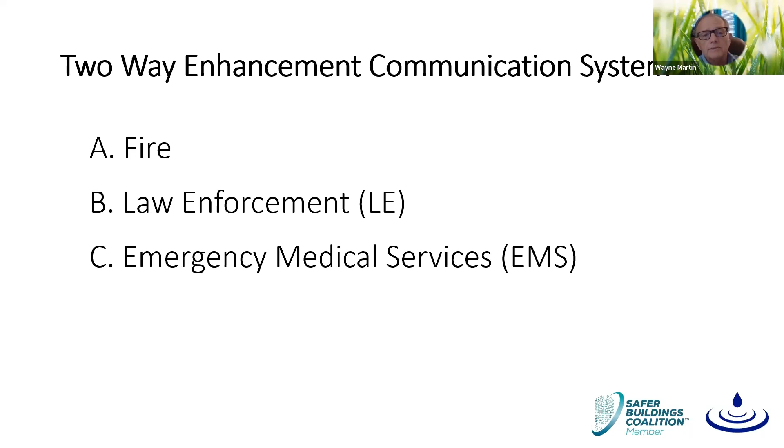Testing and reporting. What does it take with these systems to get them in place? As far as a 20-point testing system, it's done on all floors, and the importance of reporting to the AHJ. We have an implementation of the process and the fact that we should be testing now, when permits are required, installing by January 1, 2025, how quickly that's approaching, and the economic cost of compliance or non-compliance. We've got lots of deadlines in 2025, guys, for towers, huh? It's going to come up quick.

Yeah. So who's responsible? The community association manager. I put that on top because you're the key to this. Obviously, your board of directors. What can occur possibly if someone is trying to sell a unit? And then violation of the fire prevention code. And this is in the fire prevention code.

And then when we get to the end of this program, we're going to review the AHJ dates and then compliance. So as we look at this overview, it really all started with September 11, 2001. Literally thousands of people died that day. 343 firefighters died that day. There was failure of the communication system in the building where police and fire could not transmit with a two-way radio out of the building.

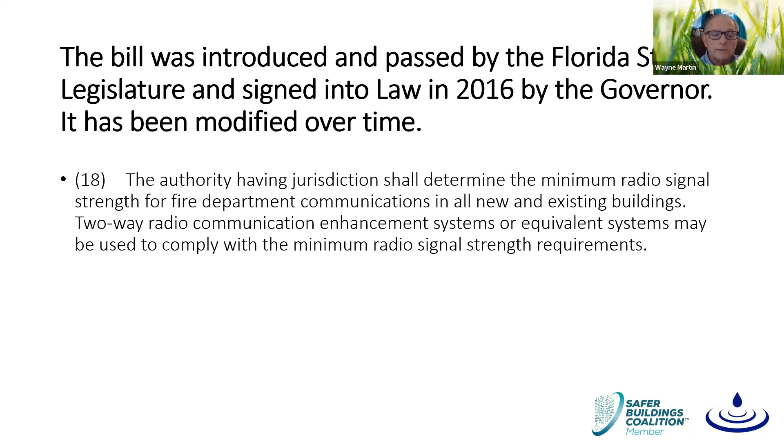Florida statute, again, I'm spending a few minutes on that. Some changes that were made: they took out wood frame buildings with exterior corridors less than 75 feet. There may be a few of those around. There's not many, but they did do that. And then if you do have that and you're declaring that as an exemption, you must have documentation that's the case. I think Ian took out a lot of that. Yes.

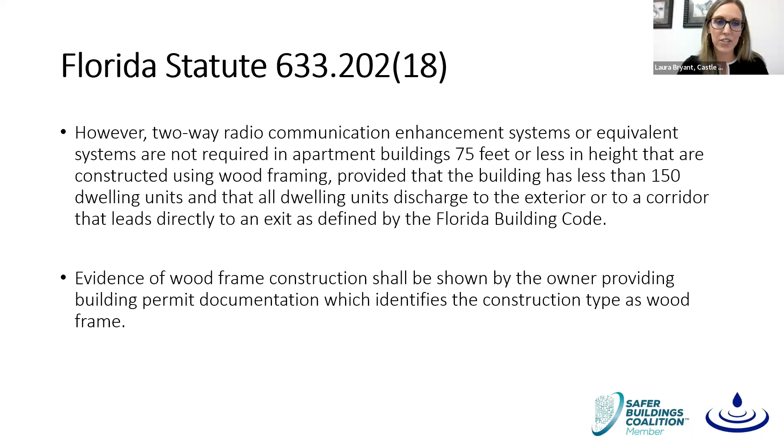So there's a part where a change was made with existing high-rise buildings and where they gave them time. Now, this originally was put in place in 2016, but people should be getting that testing done now because by statute, it's in place at the moment. By January 1, 2024, you should have a permit or you should be under contract with your contractor having a permit. Now, today is May 2023. January 1, 2024 is going to come up very quick. So the key to this is getting testing done and having that permit.

So as you see here, January 1, 2025 is when the existing high-rise buildings must be in compliance and must have the installation of the enhanced two-way radio communication system.

On that note, Wayne, and maybe this is a Dain question, what is your lead time that you're giving property managers if they call and say, I need to schedule a test? Are you backed up? Because again, this is a statute that has been around, but they're giving us a deadline. Does it take 3 months to get... Less than 30 days, as early as 7 right now. Okay, so that's to get the test done. Yes. And the report comes back how fast? Very quickly, a day or two after. Okay, wonderful. Good information.

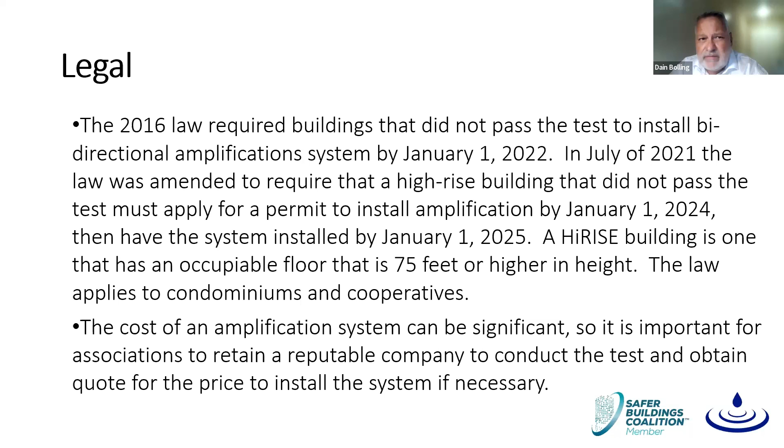Okay. Yeah, right. The new legislation that we were mentioning that's coming out July 1, exempting 12,000 square feet. That's 12,000 square feet unless there's an underground. We're in Florida. There's not too many underground areas in Florida. The 12,000 square feet and below are exempt. The same thing, the wood framing is exempt. You still have the time of 2024 and 2025 for high-rise buildings. And I'm trying to think if there's anything else we need to add to that. Probably not, but what's coming out July 1st will go into effect. It's already been passed by the House and Senate, the modification to this existing law.

So, as you see, as he continued to answer this, he talked about January 1, 2024, then January 1, 2025, having the installation. The law applies to condominiums, co-ops. And he talks about the cost, and I think this was good because legal was giving this information. The cost of the system can be significant. So get your applications early, retain a reputable company, as Dain mentioned, so you can get a quote and get testing done. And from the property management side, we start budget season in June. So we're right here approaching June. So this is a good time, managers out there, to go ahead and get a quote from a reputable company like Pure Wireless and work it into your 2024 budget.

Yeah, exactly. And the key here is that not every building fails. Right. I'll give you an example. You go down to Marco Island. A lot of the buildings in Marco Island have great radio coverage because they have an antenna right on the building down there on the beach. So if they're having issues, it depends on where these issues are. Some issues may only be on a couple floors, and it may only be in the service elevator. We've had AHJs that say, okay, we're not going to ask the building owner to put in $50,000 worth of equipment to solve the problem on 3 floors of the service elevator.

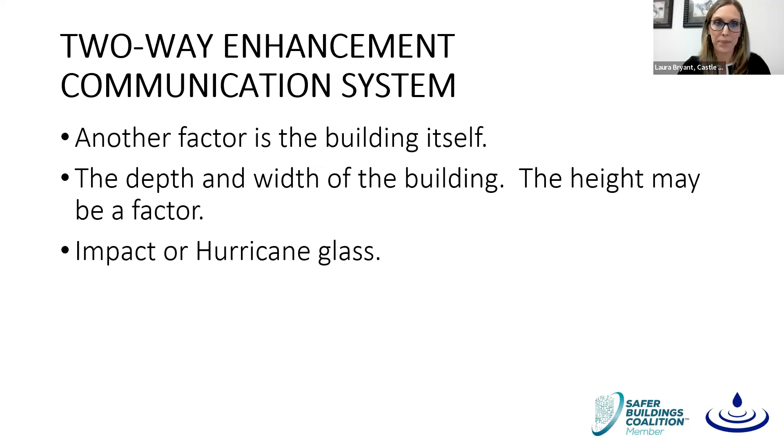And it's the quality of that public safety communication system that's important to this. And when they say, hey, we're going to spend $10 million to enhance our communication system in a county, that's going to also help individuals, condo owners, not have to spend additional money, so that they've got good service for the fire service and EMS and law enforcement. So some things that affect it: the insulation, impact glass.

We're seeing more and more impact or hurricane resistant glass. The depth and width of a building, whether it's concrete block, or now they're using reflective insulation inside these. Height may vary. So these are the things that affect the two-way enhanced communication system for public safety.

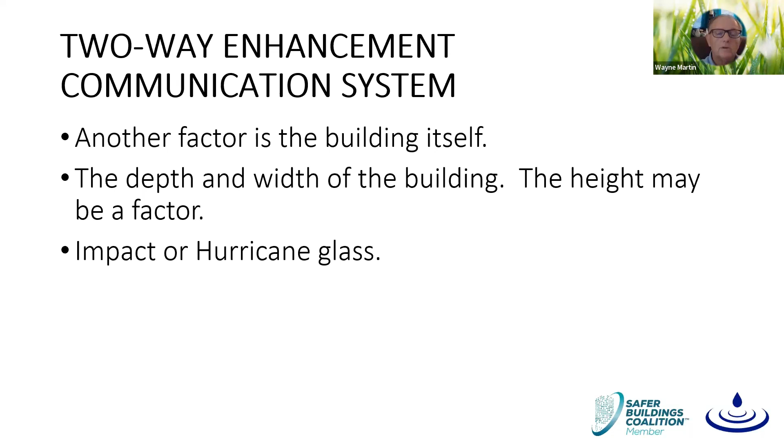The first responder, a firefighter, may be trapped, may have to request help transmitting that mayday. So it's important to the firefighter. The firefighter may require additional assistance to help with a rescue of a victim.

So as we look at that individual or firefighter that may be trapped, they must be able to use what we call a handy-talkie or a walkie-talkie. And I'm 99% sure that every public safety person on duty, I'm talking about an EMT, a paramedic, a police officer, a deputy sheriff, a firefighter, a fire chief, they all have what we call a handy-talkie. So it becomes their lifeline if they're in trouble or they need additional assistance, but it has to work properly.

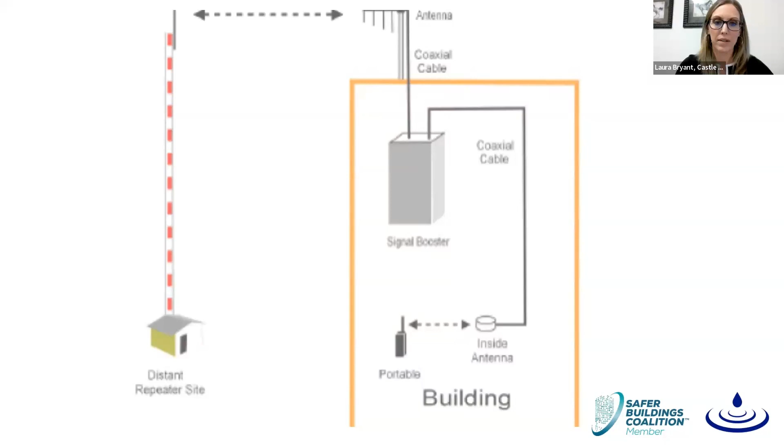The slide that's in front of you now is how it works, basically. You see the outline of a building, and you see the walkie-talkie down there, and that walkie-talkie is maybe police, fire, EMS. It could transmit directly out of the building, but in the buildings that we're having trouble with, it's going to pick up an antenna within the building. It's going to be coax somehow to a repeater in the building, a booster in the building. Then it goes out to an antenna and then directly out to the public safety system.

So that's kind of the system in a nutshell, just so you see how it would work. And if you had antennas in there for your cell phones, that would serve the same purpose to enhance your cell phone service.

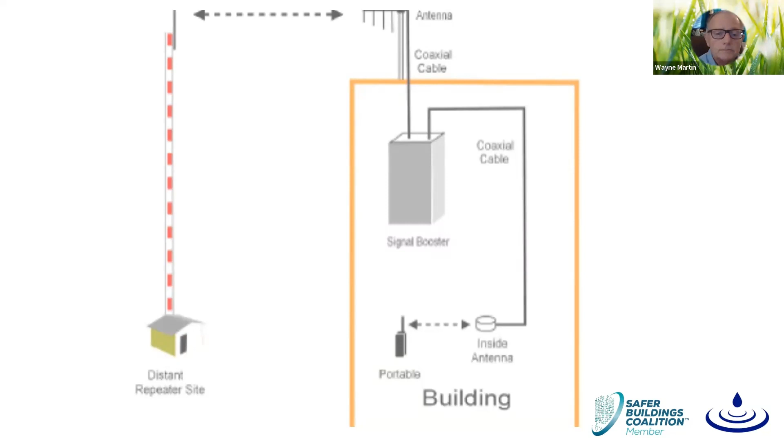So testing and reporting, this becomes another important part of this. Your vendor's going to provide testing. Your vendor's going to give you that testing so you can give the results to the authority having jurisdiction. So between now and January 1, 2024, if you have a fire inspector coming in, you have the opportunity to say, hey, here's our test, here's the results, we've passed. Or here's our results, and we're working on getting quotes to put the system in.

Fire inspectors are now, I would say, not giving violations, but they're starting to educate the CAMs, the community association managers, whoever it may be, the building owner, on what needs to take place. And again, if you have the results, you have the opportunity to share it with the inspector.

The testing is going to take place on all floors. We have what we call critical areas, areas that become very important to the fire service or emergency services. Critical areas such as command rooms, fire pump rooms, elevators, exit stairs, passageways are deemed critical, and they must have 99% coverage, and the rest of the building would have 90% coverage.

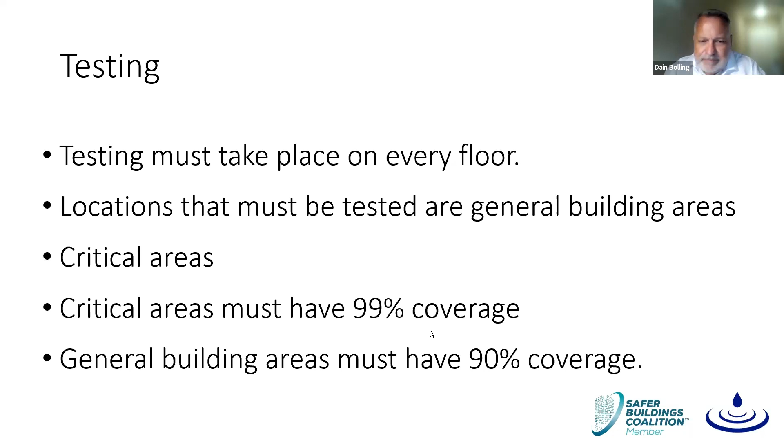So as we look at moving forward with testing, an initial testing takes place by the building owners, maybe taking place in new construction. As that system is accepted after it's installed and put in, it's under the supervision of the authority having jurisdiction. And then finally, as Dain mentioned, some ongoing testing that's contracted by the building owner or the CAM, make sure it's in the budget so it can be tested as we go forward.

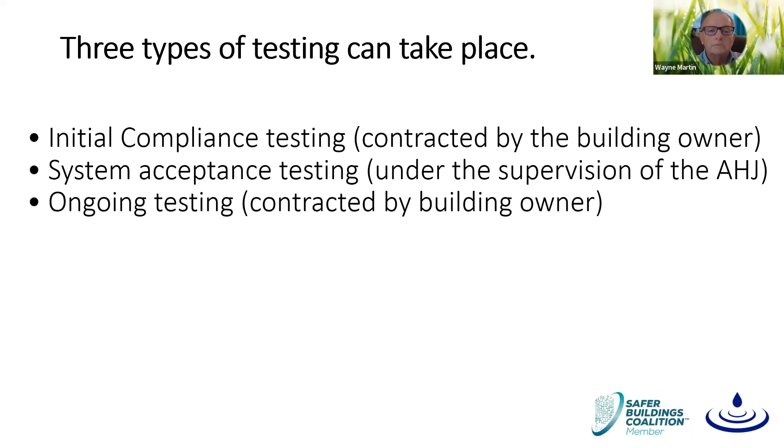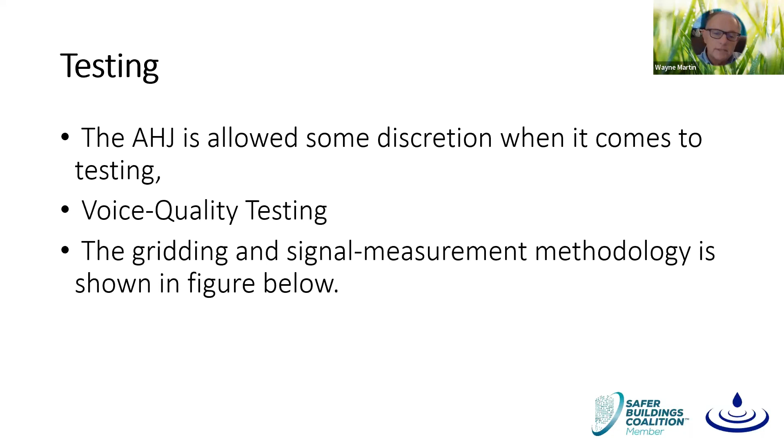Get that initial test done, and then depending on your building and depending on your authority having jurisdiction, it may be a 3 or 5 year inspection. Okay. So again, the authority having jurisdiction may come in requiring the use of a two-way radio. That may be the extent of their test. They may look at voice quality. There's discretion there as we look at measuring it with tools or equipment. It's gridded, measuring signals with a methodology that's shown in the next slide.

So it's broken down into small areas. You'll see that in this case, we're looking at a 200 by 200 foot building. That's a big building. That'd be an acre. But in this case, it's broken down to a 50 by 50 foot area. And you see that it's gridded and there's testing done in each of those locations to make sure it works. That's a big box, a big square. But when we go in and we put a condo in there and we put hallways and everything that goes with it, it's going to be tested in all those areas. Just a quick look at what that test looks like.

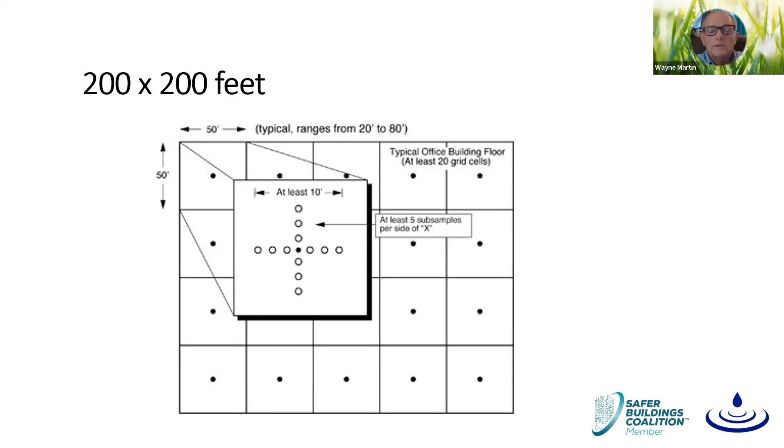So the cost of compliance, there's things that come with it. The location of where antennas may go. Testing can be as little as a few thousand dollars, but the installation could be hundreds of thousands of dollars. So again, budget, make sure you're ahead of the curve there. We did learn from some financial institutions that this is something you could finance, so it's not such a burden as an assessment. So always keep that in mind. But it does make safer buildings for the occupants as well as public safety.

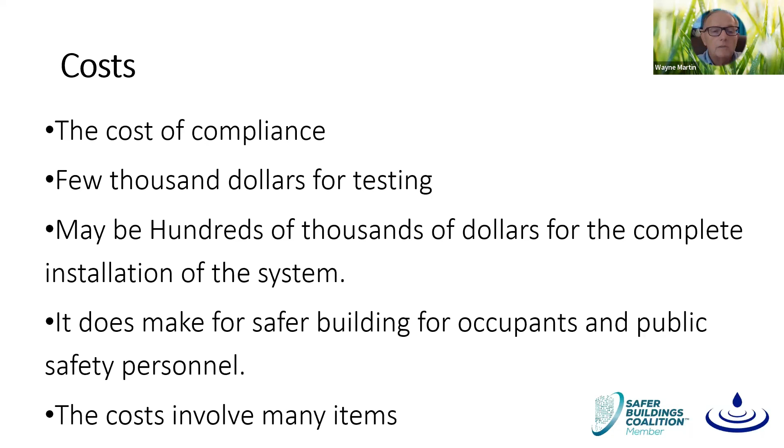So the costs involve many items. And again, we talk about the conduit, the fact that you have to have a backup power supply, and that monitoring is required, plugged into your fire alarm system. That monitoring is automatic. We use a dedicated panel going into the alarm system. And basically what it's going to show is if there's problems with the system, if there's a malfunction in the system, it's going to give a trouble. You've all seen what those look like, but it's going to pop up and show that there may be a problem. Somebody knocked out an antenna. So you get that system back up as quick as possible.

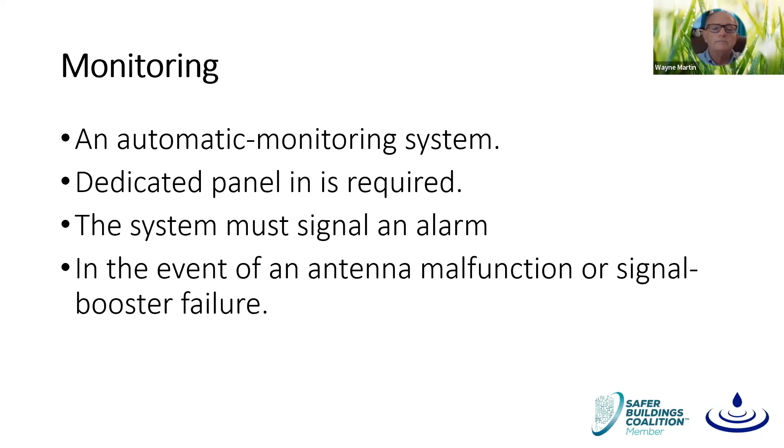The installation, right, we go back to a close coordination with the CAM because you start putting antennas up on the roof and there's owners that say, nah, I don't like where that antenna is. So you want to do these things right the first time. You may be going through a penetration through a roof. It may require fire rating in there.

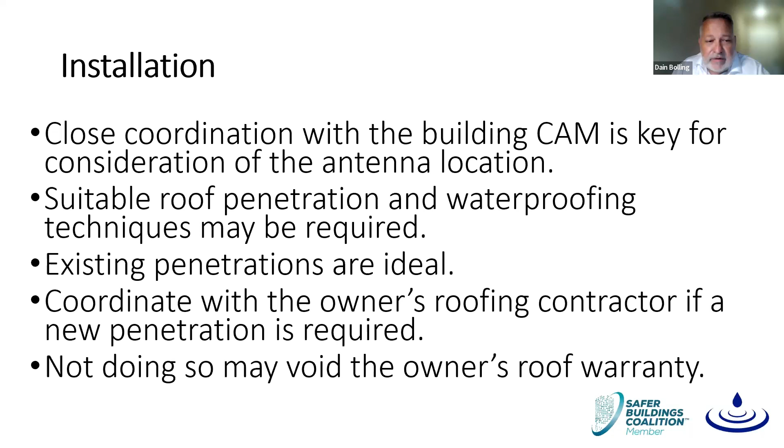Working with the roofing contractor. If you're penetrating the roof, you don't want to void any warranties. So it's working together with multiple contractors, working with a reputable contractor to install this, but they're working in conjunction with the CAM. Especially when you're dealing with elevators. Okay, yeah, great. These are all great points. Yeah.

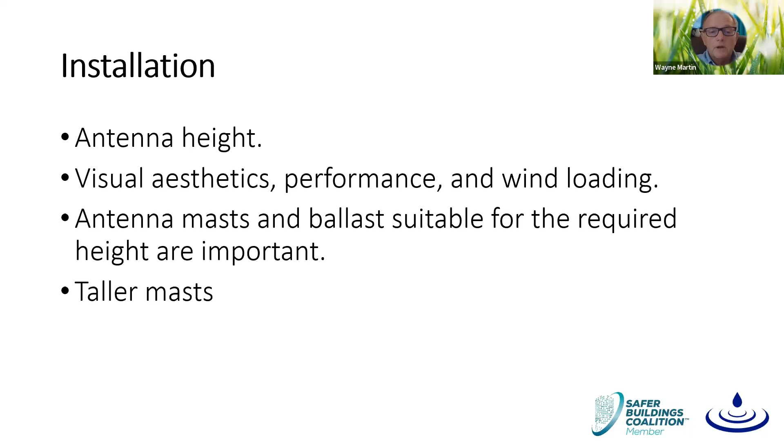So going back to antennas being visual, there's wind loading. The antenna mast and ballast suitable for required heights are important. You may have a taller mast. Again, you want to work close with the installers to make sure you don't have owners that say we just don't like that. And you want to reduce the cost. Keep the runs going to the roof simple.

The fact that a building may lose power, you're required to have a 12-hour battery backup. But if you have an automatic starting generator with some storage batteries, then it's 2 hours of operation at 100% capacity. And these things can go in line with improvements you're making to your buildings anyways with generators and those things. So it all comes together to be important and keep the system up and running.

So there are antennas that we're looking at internally. You may have that antenna in the hallway. You may want to make sure that as the manager, you have it in your office or the security offices. And again, keeping in mind, there's the opportunity to do public safety as well as your cellular system and reducing the cost overall by doing that at the same time.

Okay, we talk a little bit about liability here. What happens without compliance? Well, we know that that's going to be addressed by the court. We know that in Surfside, the condo that collapsed, those lawsuits are over $1 billion. So what's happening there is everybody gets sued. The architect, the engineer, the community association manager, the board of directors, and in that case, even individual unit owners.

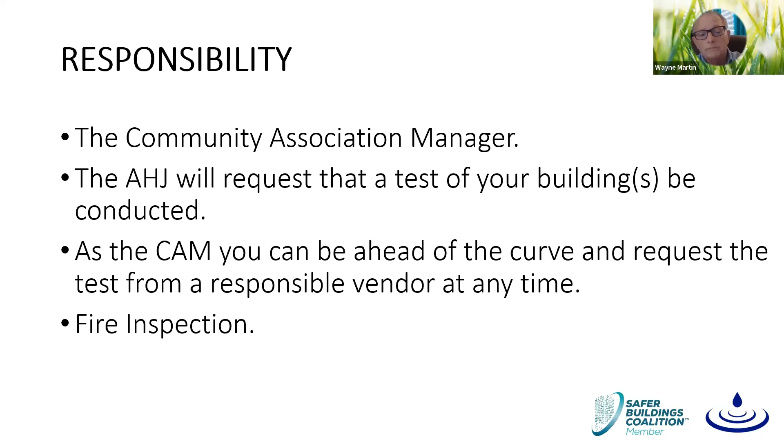As the community association manager, you're the primary contact with the fire department. We often see the authority having jurisdiction requesting a test. As the CAM, getting ahead of that curve, before the fire inspector comes in, you can have that test done. And instead of the fire inspector saying you're going to have to do this in the future, you can hand the inspector your test for compliance, or show that we had a test and we're going to be installing the systems in a few areas that require it. Contracting for a vendor.

This is now the time to do it. It shows that you're proactive. Again, going back to budgeting as you're going into budget. And I repeat this because: ask your vendor about how many buildings fail. And if they say 99% fail, then find another vendor or have a second test. You shouldn't necessarily have to have a second test, but many buildings are going to be tested and they're going to pass. So the cheapest way to do it is get the test done as early as possible.

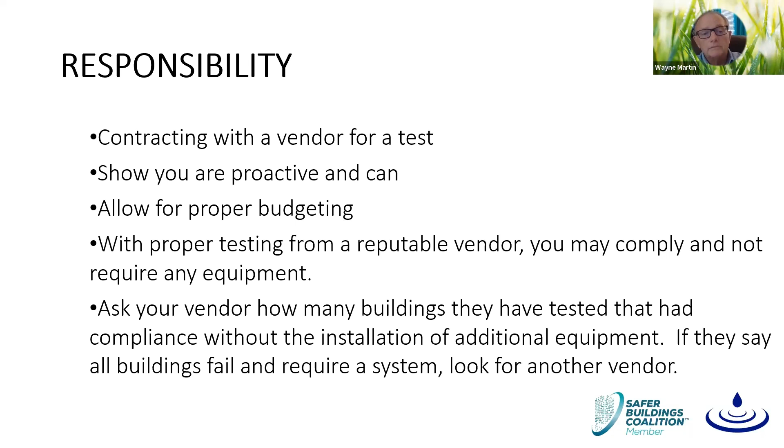And even though there's that 3 and 5 year requirement down the road, because conditions can change, you can certainly be ahead of the curve now, not trying to hurry up and get it when the vendors are saying we've got things booked out for 6 months. Right. I mentioned some may require it on some floors, some on other floors.

If a countywide system is properly designed, no equipment may be required. But there are dead spots in the county. We were meeting with county officials years ago, and they were going with a new vendor, and the vendor said 75% coverage. And I sat on that committee and said that is unacceptable, that the public safety system has 75% coverage. Let's work for 100% coverage for everybody.

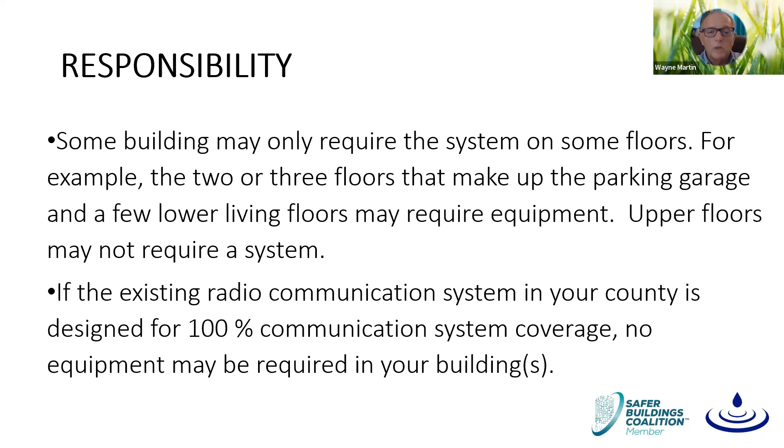And I think in the final analysis, because we have a lot of Everglades and those things in Southwest Florida, we ended up with 95% coverage. But 75% was way too many areas of dead coverage. Yeah.

So your board of directors is obviously responsible to comply with the installation. A building in violation of fire code may be unsafe for first responders, owners, and visitors. You have the opportunity again to be proactive. That's key to this.

I've got a question in regard to being compliant. So Alex asked, does the contractor who performs the test provide the association with an official document stating that the building is compliant? So go ahead, Dain. Some AHJs will issue after a report is issued by a vendor. So in our instance, we issue a report. That report, some AHJs, if it's a passing report, they just require that you keep that on site for the next fire inspection. And it's sent to the AHJ as well by the vendor.

Others will actually issue you a compliance letter on a passing. And they'll definitely issue you a compliance letter if you fail and you have a system put in place; you have to have a compliance letter that says that system has been installed and accepted by the AHJ that's responsible for the FCC license for the radio network. So different areas will handle this differently. Some will give you something on a pass. Some will only require you to have the report that we give you.

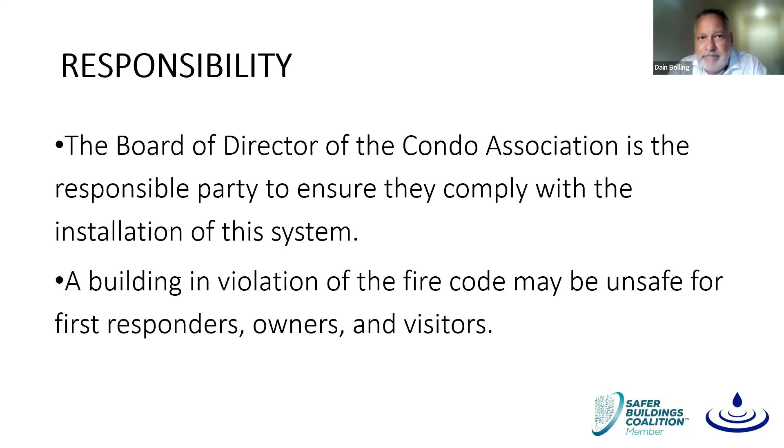Due diligence by a prospective buyer may reveal fire code violations. Now, they use title companies and they do title searches and those things. Commercial buildings often will ask for a fire code inspection before they buy a building or enter into a business. It's a simple public records request to the fire department to provide that information. But if your building is in violation of the two-way enhanced communication system not working, someone may say, I'm not buying in this building. And all of a sudden there's an uproar. People are saying, well, I may want to sell my building next year. If there's fire code violations, I won't be able to. So again, another little nugget: keep your building in fire code compliance.

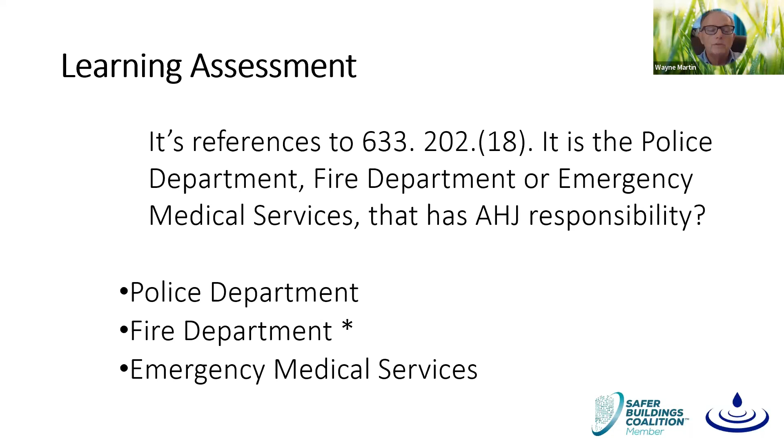The next one is what does the fire department have? Inspection authority, and that inspection authority comes from a Florida statute in the Fire Prevention Code. What are the dates? We kind of went through this, but the dates are January 1, 2025 for the installation of the system, and others should be in compliance now. So there's a lot of work to do, a lot of tests to take place. But keep in mind, these are high rise. Your building may not be a high rise, so technically it should be in there now, but be proactive by January 1, 2024. Make sure you've got the inspection, and hopefully you have a contract and a permit so that by January 1, 2025, you'll be installing the system.

And then just some conclusion here. Florida statutes gives the authority to the AHJ. The systems are important to all owners, visitors, public safety. All buildings should be tested and working towards compliance. Time is of the essence, and it requires the installation by January 1, 2025.

And just some references where we got the information: State Fire Marshal's Office, Naples Daily News with Legal Matters, Richard DeBoest wrote that, NFPA. I do a lot of work with Richard.